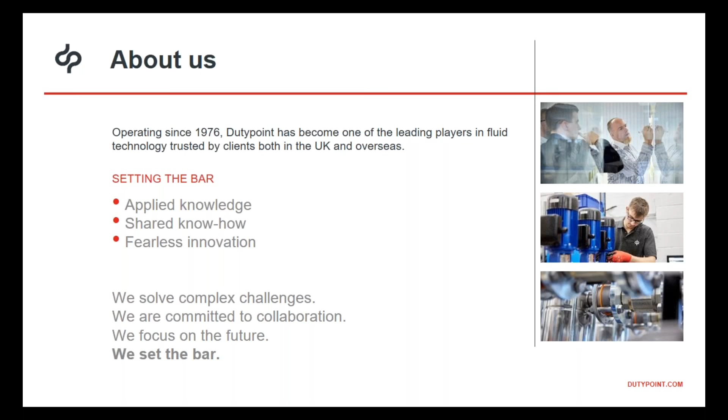So to start off on underground, why would we want to put plant equipment underground? There are a few obvious answers to this question. Hopefully some of these are obvious to you. Of course, plant is something that particularly architects and developers want to be out of sight and out of mind. They don't want expensive above ground space being taken up by what they see as unsightly plant equipment. If you've got a hotel, for instance, your plant room might take up the equivalent of 4 hotel rooms, which as a developer, you'd rather were used as hotel rooms.

So what we want to do is regain that prime above ground real estate, that space that we could use for revenue generating activities rather than plant equipment, which doesn't generate revenue. So really it's about reclaiming that above ground space, taking the plant, putting it underground, out of sight, out of mind. Now, a lot of retrofit projects we get involved with don't have sufficient plant room space for the plant that's required for whatever reason.

I'm going to talk a bit about a case study later on where that was the case, but if you have projects where there just isn't sufficient plant room space available, of course, one option is to build more space, which is potentially very expensive above ground, or to put in temporary type structures which can house the plant, which has issues with it as well.

Of course, in some prime developments and developments in general, you don't want noise being transmitted from plant equipment into the rest of the building. And actually, what we're discovering is some consultants particularly are wanting to really take account of the noise footprint of the plant equipment that they're specifying. So actually looking at underground as a solution to unwanted noise is something that maybe not everyone's thought about before, but it's certainly something that we are hearing more of.

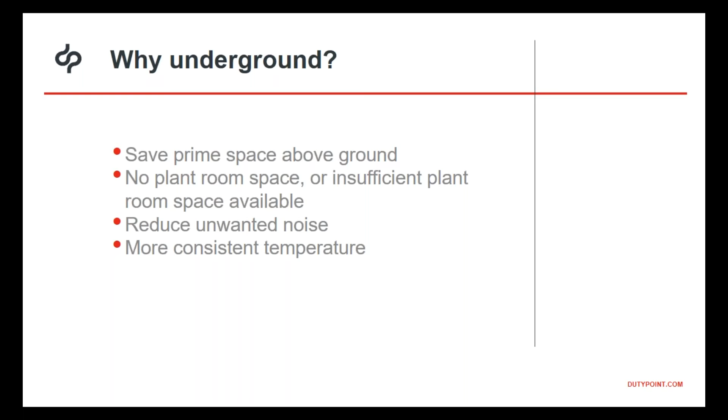Now, of course, that's all very well, but there are some problems associated with putting plant equipment underground. The installation's often expensive and time-consuming. Of course, you've got to take account of any existing services that are underground, spend time surveying, civil engineers' involvement, civil contractor costs. It's a very expensive, time-consuming process.

Of course, you've got to create an excavation, and potentially site operatives have to make entries to that excavation. And of course, that is something that we want to avoid where possible. Sending people down into an excavation is always a potentially hazardous environment. And the less we do that, the better, really. And that's the case with all these on-site health and safety issues.

Now, concrete shuttering is another big area that is a time-consuming aspect of putting any sort of equipment underground. You have to spend time constructing temporary shuttering on site. It takes weeks, lots of equipment, lots of specialist personnel are required. So the installation side is expensive and time-consuming.

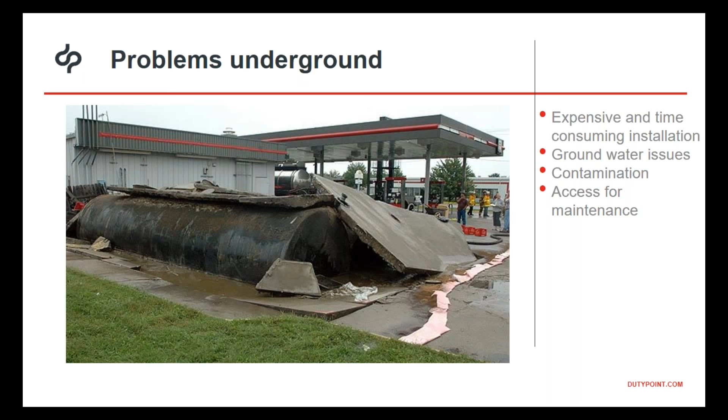You've got all these issues to do with water contamination, and in a situation where you're supplying potable water to a building, of course, if there's a problem, you want to get maintenance personnel there very quickly. And when you're in a situation where, in order to enter the plant room, you need special training, most people can't just go down there and solve basic problems. You'd have to call in specialist personnel as quickly as possible. So there are a few issues to contend with there.

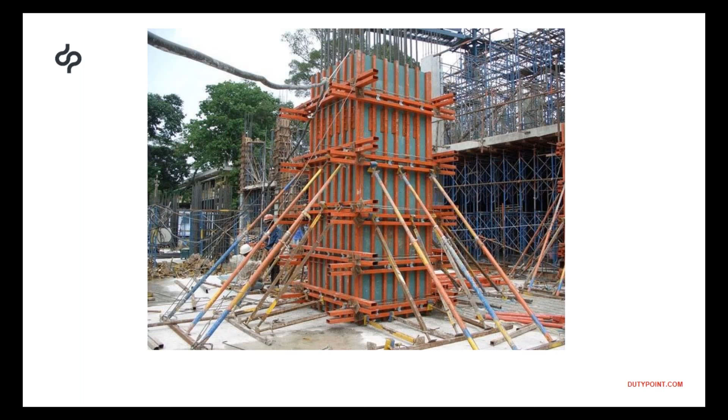Now we've seen a few systems like these on the market for a few years, and we just kept on thinking, there must be a better way. And of course, being in the industry, we hear about a lot of the problems that happen with these systems that are on the market. Sometimes they're not built strong enough to withstand the pressures of being installed underground. Often they're made of GRP, which is not an inherently strong material from that perspective. So the strength, of course, is in the concrete, but then we've seen examples of underground plant rooms being installed and not being strong enough to withstand the pressures.

We've seen an example of groundwater ingress into potable water storage tanks, which of course is pretty disastrous. We've seen unforeseen maintenance costs. We've seen failed tanks, failed systems, which actually have to be abandoned and filled in with concrete because they've failed basically. So a lot of this, I think, puts people off installing potable water tanks underground. But there is a new approach, and we're very excited about this new approach, and it solves basically many of the problems that I've just been talking about, which hopefully you'll think is great news.

So the new approach, what is it? Well, what it does is it genuinely does allow developers to regain that prime real estate by locating essential plant equipment underground. So you can use dead spaces like car parks, driveways, space that is necessary, but actually you don't want plant equipment there. The confined space issue is a massive one, and there is a solution to many of the confined space challenges, making maintenance much more viable over the lifetime of the unit.

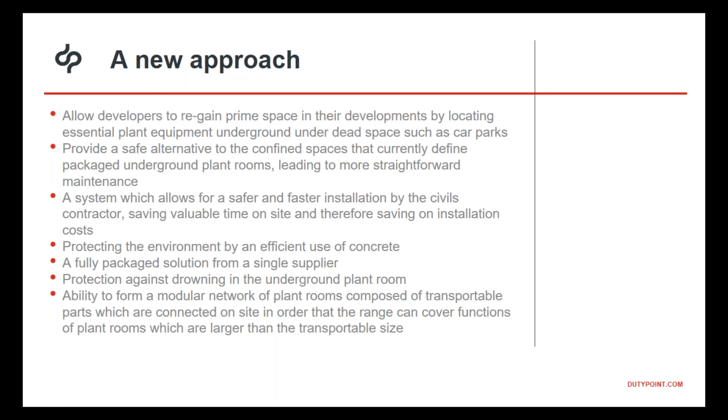And immediately that takes away one of the major issues, which is safe access and safe escape in the event of an issue. So someone having to climb up a ladder is much slower and less safe than someone just walking up the stairs. So if someone has to go down into this unit, if they have an issue, and they need to escape quickly, they just walk up the stairs. It seems like an obvious solution, but actually it hasn't been done until recently.

So that actually takes away one of the major issues to do with working in confined spaces. Now, the other issue that I mentioned earlier was the risk of flooding. And if you just put in a watertight shell and then put a tank inside it, if that tank fails, the water just goes into the shell and could drown someone. And of course, you've got this connected up to a mains water supply. And unless there's any valve to stop it, the mains water is just going to carry on pouring into this unit and could potentially drown someone.

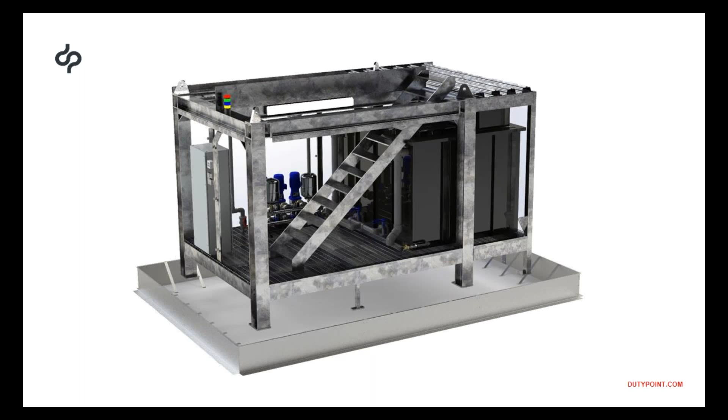and then there are pumps to pump it out, and there are automatic shut-off valves for the inlet valves. So if the sump pumps start pumping, the inlet valves from the mains water automatically get shut off. So the risk of flooding is greatly reduced with this system. I'll show you another view as well.

So, unified control panel. This is on the right hand side, you can kind of see there. There's ducts for the pipes to go in and out and for cables to go in and out. So there's a cold water booster set in this example, but conceivably you can install any kind of plant equipment in here. But this unit particularly is designed for basically a complete cold water pressure boosting system.

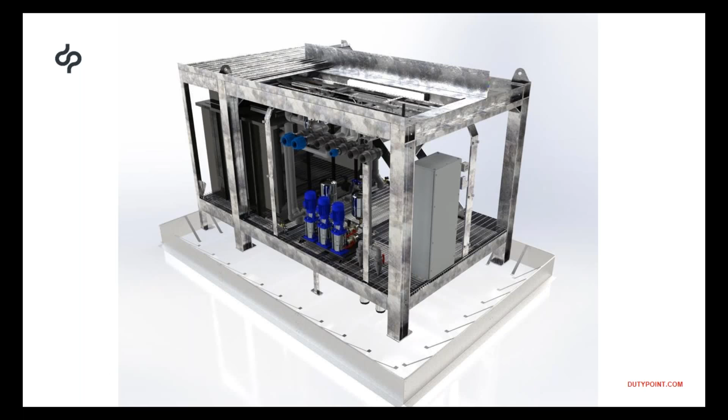So when these units leave us, they've already got the shuttering all there, so it doesn't have to be done on site. And that leads to massive time savings. Rather than it taking weeks to do the shuttering, it's already there. It's all done. So that's potentially weeks taken off the installation time, and plenty of labour hours taken off the installation time. And that is a really exciting development, because it just cuts the installation costs massively.

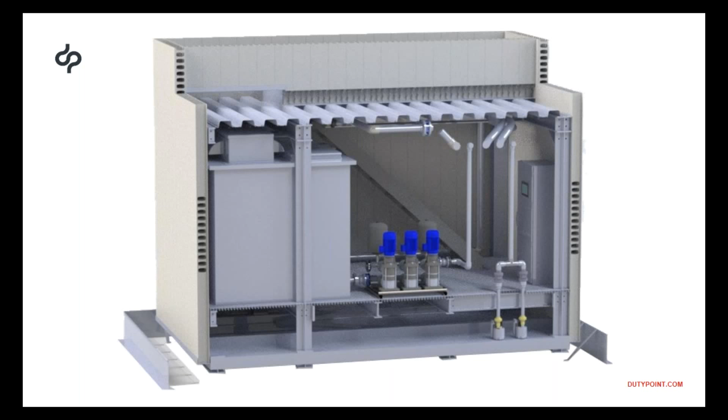And just to show you what it looks like from the outside, this is a photo with the shuttering all in place. So this is all one unit that can be installed all in one go. They leave the factory on the back of a low loader lorry, and they're just craned into place on site, and it just takes many of the challenges to do with installing these systems underground out of the window.

Also, actually, another nice feature to highlight here is that you can see at the top, opposite the top of the staircase, there's a safety warning light system. Now, what we've done is incorporate a system of sensors that test things like the temperature of the air in the plant room, the air quality, and also monitoring for any potential flooding.

And as soon as someone opens the access hatch, they see these warning lights, and there's signage next to it to say, okay, green light means yes, you can enter. Red light means no, there's an air quality issue, don't enter. Blue means there's water been detected in the underfloor area, so there's potential flood risk. So be careful before you enter.

And this is a feature that just hasn't been seen previously in an underground packaged water pumping unit, and it just mitigates many of the risks associated with working in confined spaces, to the point that in most cases you could maintain this system just with one person that doesn't necessarily need to be confined space trained.

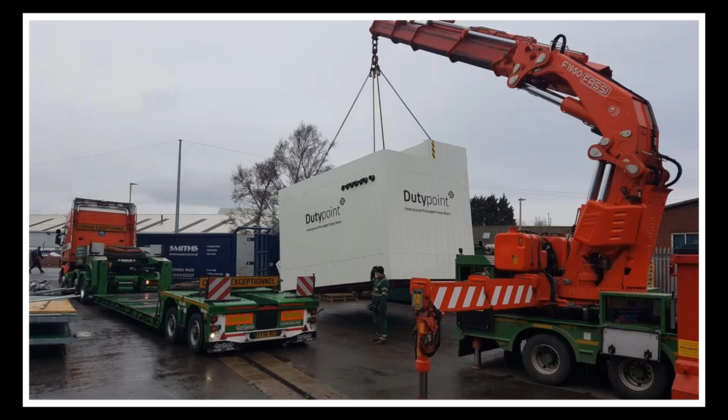Now, one thing that can greatly increase transport costs is if these units go over a certain width, you need to have an escort vehicle. So what we've done is design them such that they are not outside the width that requires that, greatly reducing transport costs. Because when it comes to offsite manufacturing in general, one of the big issues, of course, is actually getting these big, heavy prefabricated units to site. So it's important to design them in such a way that those issues don't add massively to the cost. So that's just something to be aware of.

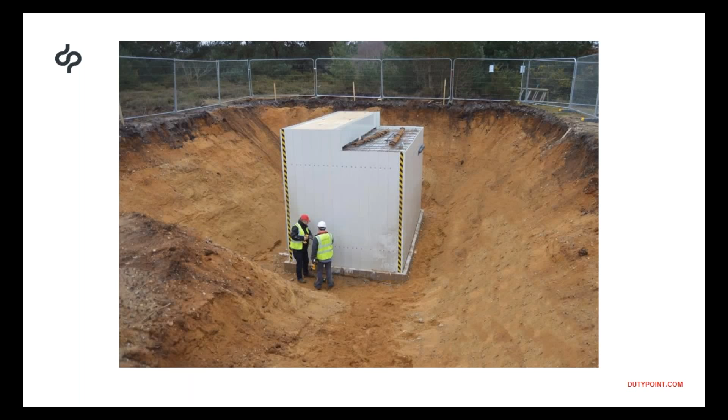And this is the unit actually within the excavation itself. So you can see the excavation at 45 degrees, which is fairly simple for a civils contractor. It was basically just craned onto the base like this, in a very simple process. And this shot was taken within about 2 hours after the unit arrived on site. So you can see the time involved in installing these is just so much less than equivalent systems.

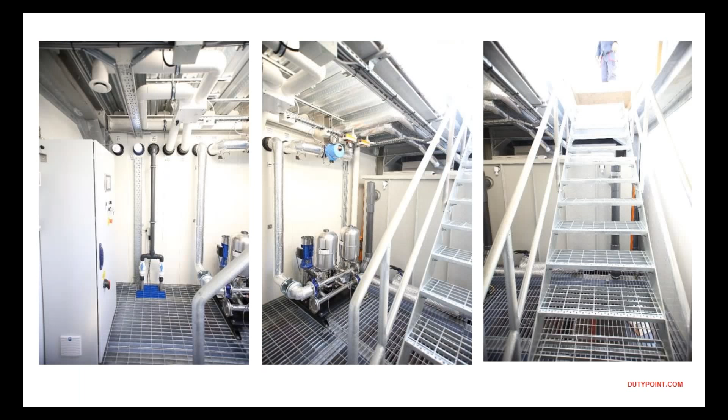Excuse me. So just to highlight a few features going from left to right, you've got a unified control panel with an HMI touchscreen. You can operate all the parameters of the plant room from that central touchscreen, and also it's got a SIM card unit installed.

So this unit can actually be managed and monitored from anywhere in the world over the internet, and that's very important. Just because it's out of sight, you're not necessarily always going to pick up on problems as quickly as a surface level plant room, which is easily accessible. You can hear warning sirens, or you can send someone in daily to check for any warning messages or lights.

Having the remote management is a very key feature, because it allows you to be aware of the problems before the occupants of the site are aware of them themselves, which is very good. Obviously, you can see a lot of the pipework and duct. You can see the air handling unit on the left-hand photo on the top right. You can actually see a thermostat unit in the bottom left, which is one of the sensors for monitoring the temperature and the environment in the plant room.

There's a variable speed booster set, 3 pumps there. The inverters are actually all mounted in the control panel. One of the big changes for us was thinking about the plant room as a system in its own right. So rather than thinking of a plant room as a space where various systems are installed, this whole plant room is a system, and there are many factors that all have to work together to make the whole thing work.